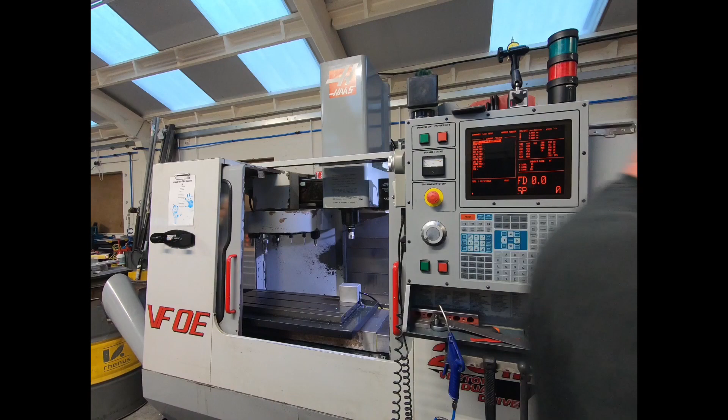Right, so I'm back here at the Haas machine. I'm going to try something with the machine to upgrade the memory. Now, anyone who's got one of these older Haas machines knows that the memory on them was appalling. This one is mediocre. It comes with 1 megabyte of memory. Now, considering my mobile phone now is 256 gig, that shows you how bad memory on these machines was back in the day. So this machine has actually got 2 memory chips fitted to the board that are 512 kilobytes each, making up the 1 meg memory.

Now, when I sorted out the blown vector drive, I took it out and also took the boards out to look at the battery on the board. I've got new batteries to replace it, but I haven't done that yet. But I noticed where the memory goes on the main PCB, there's actually 16 spaces on the board for the memory, and mine's got 2 chips in it, each 512 kilobytes. These are the little chips.

I've got the part number off the board, and I've managed to buy, if I just show you there, some genuine Samsung chips, and I bought another 14. Not sure if it'll focus on that number. I'll just drop it on the floor instead, because that'll probably help. So yeah, there's the chips.

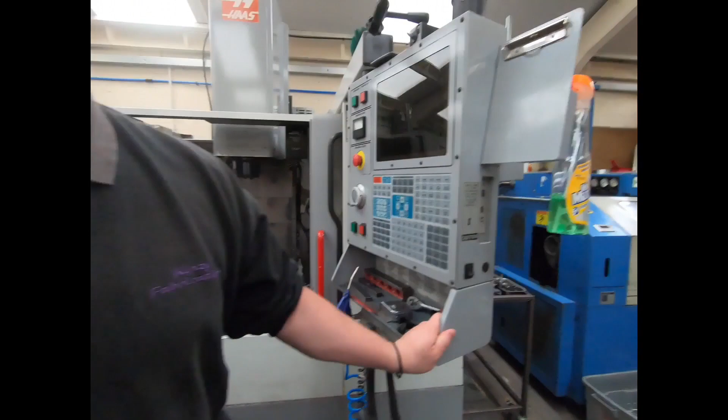If you're still going to use that to upload your programs, you're still going to be limited to the 1.44 meg that the floppy disk limits you to. Even when you're using a USB, you have to format the USB to the 1.44 floppy file size. So the downside is you're still limited, but you can upload larger programs, I've been told, and I've not tried it yet, via the RS232 cable.

So not drip feeding the program, but just uploading it to the machine if it's, say, 1 meg, 2 meg, 3 meg, something like that. So I've only used one program which is bigger than 1.4 meg, so it's not a necessity. I could break that program up into 2 parts and load them individually, but if there's more memory on the machine, there's loads of little jobs that I do, not very often, but I'd like to just leave them in the machine. And then all I've got to do is look at the sheet, check my tools, load my tools, and then I know the program's good to go because it's the same program I used last time.

So we've got the chips. Just go around the back to where the board is. I'm going to take this board out later today because the annoying thing is you've got to take this cover off, and my one, different versions probably different, but mine's got 3 boards all layered, and typically it is the backboard underneath everything that is the one you need to get to, which has your memory chips on, and it also has your battery on it. So what I'll probably do is, because it's got the battery on it from Haas, I'll buy the dual battery board, and it just plugs into a connector, so you can put 2 batteries in and remote mount them on the panel so they're easier to get to.

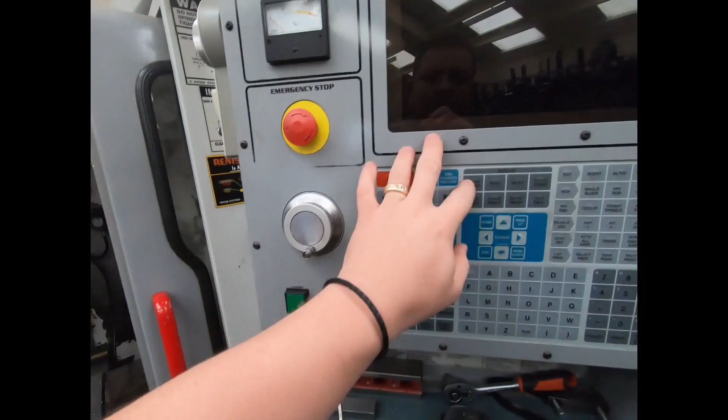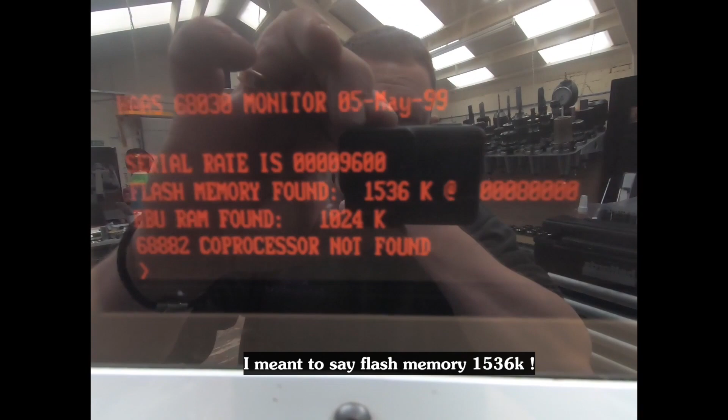So if you want to check the memory on your machine, another way to just check what you've got, let's just shut this door. When you turn on the power, you hit the power button and hold the program conversation. So let me just do that. And then it comes up here. So serial rate, there you go, flash memory found, 1536K, BBU RAM, 1024K. So that is basically the 1024 is 2 of these 512 by 8-bit chips.

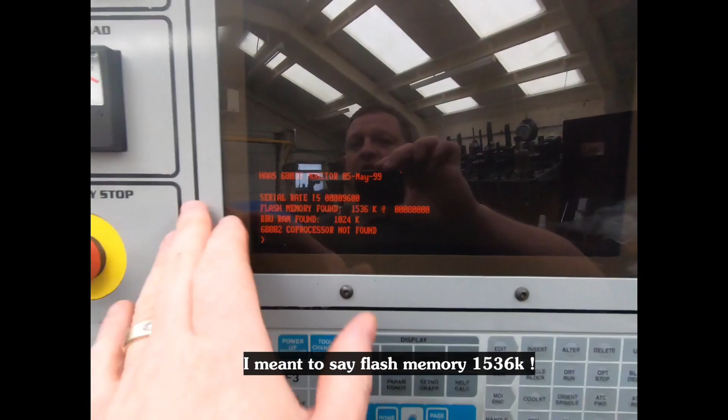So I'm hoping that when we got this soldered in and the rest of the board is filled, the first thing when I turn it on, I may or may not have to reinitialize the control, so I might not even get this first. We'll have to see. I'm not sure what the coprocessor not found means, but that's exactly as it is normally from standard. So if we have to reinitialize, through the help of people off of the Practical Machinist forum, I've got the procedure to clear the battery backup memory, I've got the procedure to reinitialize the control, and I've got the procedure to clear and reset the machine serial number if required. So if I need to do that, then that's what I will do.

But I'm not 100% sure. Some people have said they've soldered in new chips and it's worked. Different style boards. Someone said they left the battery in and done it, and they didn't have to reinitialize the control at all. They just carefully put the chips in first, made sure that they didn't short anything out, and it worked fine. But it's probably not the best idea.

So what I've done, backed up my parameters, backed up my settings, backed up my programs, got it all on a USB. I've done that last week, but I'm going to back it up again today because I've redone something on the probe macros. So I just want the latest I can. The board's going to come out tonight, so I'll do another download of settings, programs, parameters, all that sort of stuff. So I've got it if I need to load it back in the machine, get the chip soldered on in the morning, and then we'll start putting the board back in, and fingers crossed I'll come back and show you the new memory.

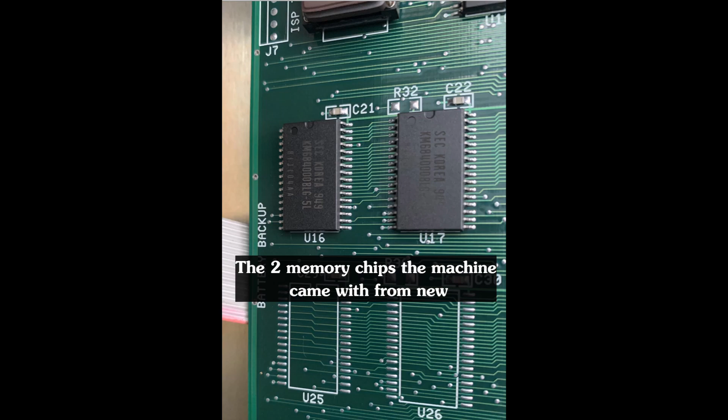Okay, so the board is back from having the new chips soldered in. So originally we had these 2 on the left here, and now we've added in 14 more. So I thought if 1 or 2 is going to work extra, 14 should work extra, or none of them are going to work at all. So let's go for it, because we're going to pay for them to be put in once and pay for them to be taken out once.

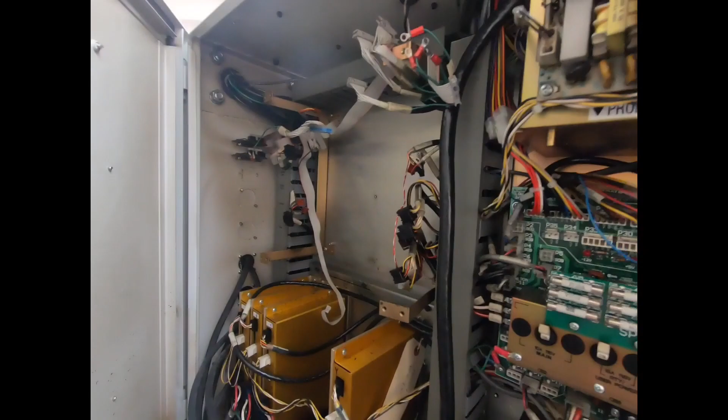So there it is. There's the other boards I took out of the machine all wrapped up. There's the space in the machine. Now they did disconnect the battery. You can see the battery's still in the holder, but he's obviously put this little tab in there just to make sure it's not making contact.

Now what I do have, excuse the noise, that's a lathe running a load of parts on the bar puller.

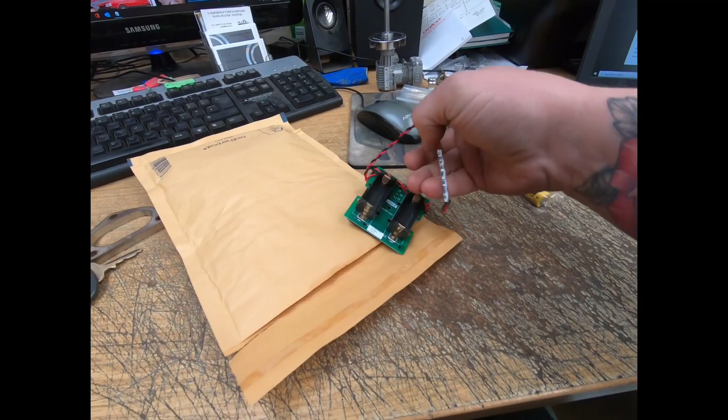While all the machine was out, we've got new batteries. Everyone says the holder doesn't come with the batteries. It did, so I bought 2 elsewhere and it came with 2. I've got the double battery board from Haas that I can now just plug in before I reinstall everything. Put 2 batteries in, mount it somewhere that it's actually easy to get to, and then the connector goes to the connector that is on the board.

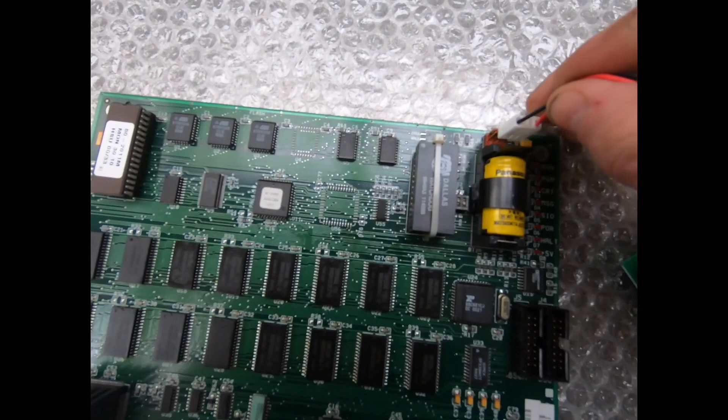Because the downside of where the battery is, it's on the actual board nearest to the inside of the cabinet, so you have to remove 2 others to get to it. So this connector will go on there, and then when you replace these batteries, the reason there's 2 is so that you can take one out, one's still connected, put a new one in, take an old one out, put a new one in, so it should never lose its memory again.

So I'm going to get this reinstalled, get it all mounted, find somewhere suitable to put this, so a nice bit of Velcro that's stuck to it, and then we'll power it up and look at loading all our parameters and settings again, and we'll see if this actually works. Fingers crossed.

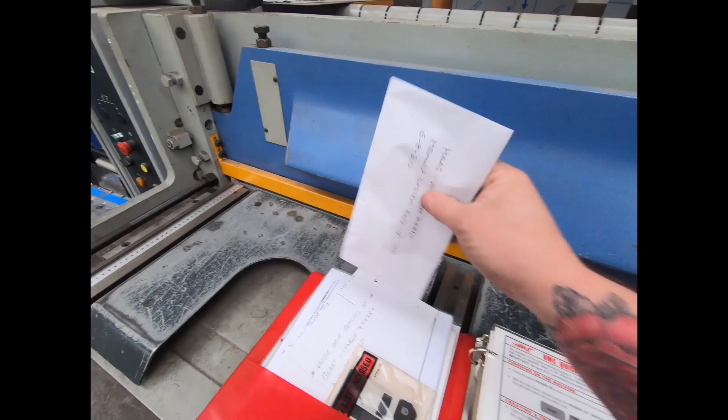Okay, so we fitted the board back in with the new memory soldered on, and we've upgraded, a bit dark in there, apologies, to the Haas dual battery, because as the single battery had to be removed anyway, we thought, why not upgrade? So that's done, the batteries are in. We haven't powered it on yet, so this first test or potential 50-50 failure is going to be seen by all of us at the same time.

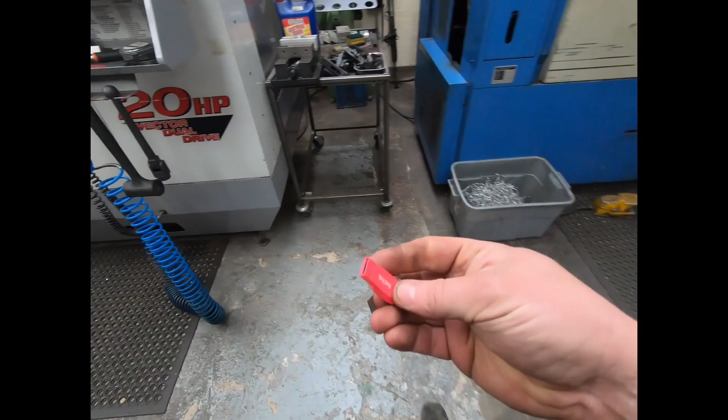Now before I took this apart, I done a parameter backup, so I actually made 3 copies in there. All the parameters for the machine, the parameters, the settings, the macro variables, the programs, and I think there's something else. There's the original floppy disk copies. That's to do with testing the motor when I've done the resistance.

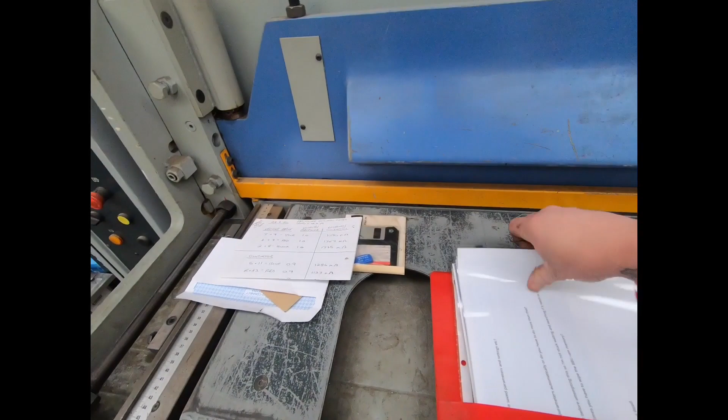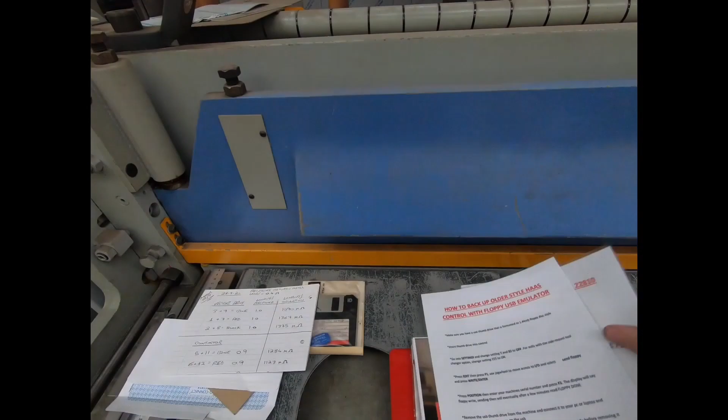This is what I printed off the internet about loading programs. This is something that one of the users on the forum jotted down for me on the conversation about upgrading the Haas memory, so I've got some info there. And then that was what I wrote down. These are the ones that we've got: offsets, parameters, programs, settings and macro variables. They're my codes. So we've got to look at how we restart the machine.

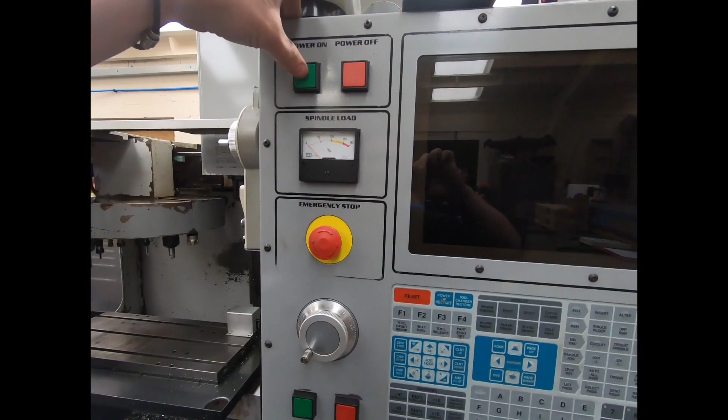Now, because this is as new to me as it is to you, let's turn it on, and it either will not work at all, or we will be playing around to try and get the machine reset, because the battery's been out, in actual real terms, and we have lost anything that we had stored.

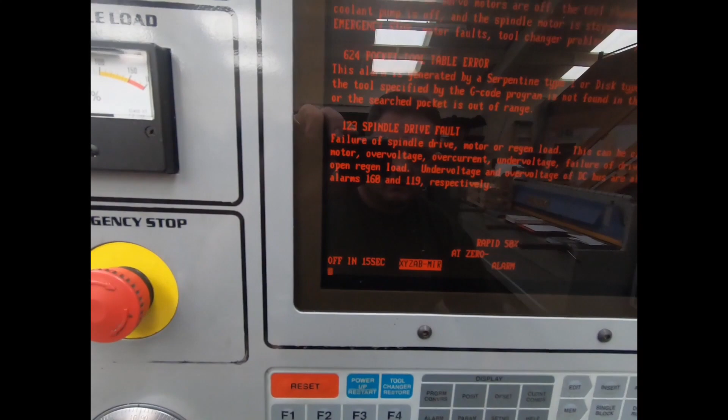So right, we just got a flashing cursor up the top. Right, we've still got some of this stuff in there, which is a good sign. Setting CRC error, system error, pocket tool table. Right, so we're on there. What have we got? Right, so we're getting a countdown, so we're going to have to go through this and start again. So I've got off in 15 seconds, XYZ AB, alarm, pocket tool table, spindle drive fault and servos off, and

we are shut down. So what I'm going to do is have a quick read, see what I've got to do to start with, just to get the machine to stay on, so I can go into some settings and try and change what I can. Then I'll come back and I'll try and do a step-by-step with the camera. Fingers crossed. Right, let's balance you on the toolbox.

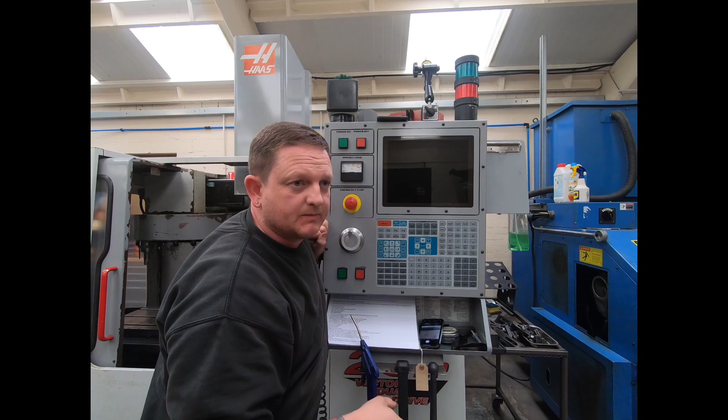Right, it's 5 minutes later on. Anyway, we had the alarm giving me 15 seconds to shut down. What I noticed, when it comes up with the Mocon version, software version, next to model, it was blank. So from what I've read on the forums, the machine doesn't know what it is. Say a VF2, a VF6, as this one is a VF0E. So got to the 15 seconds, it shut down.

From what I'd researched before I tried to do this upgrade, to have everything I need rather than have the machine offline while I searched the internet, I'd found that someone said turn the machine on whilst it's still alarming out and starts to count down for 15 seconds, hit settings, go through to setting 7, which is your parameters lock, turn it off, and then go back, quickly type debug, and then press enter, and then you'll have a little cursor flashing here. It doesn't tell you what to do, but when it's flashing, there's 4 or 5 N's, I think it is. Then I typed, where are we at?

VF0E for this machine. Your machine may be different. Whatever model it is, you've got to put it in exact. Press enter. Now that cleared the alarms that were on the page. It turned off on its own, and then it turned back on, went through the stage, and this time it showed Mocon number 11, software version 10.35, and next to model it now says VF0E. So it knows a little bit more than it did the first time round.

Then the page come up and we've got another load of alarms. What I wasn't expecting is that there's another shutdown alarm saying regen overheat. And then underneath it, it says regen overheat time shorter than parameter set in parameter 297 or something like that. I didn't quite catch a glimpse of it and it's turned off. So we're going to go back in now and then potentially type debug, I think. I'm just going to have a quick read of what he said. Where's my phone?

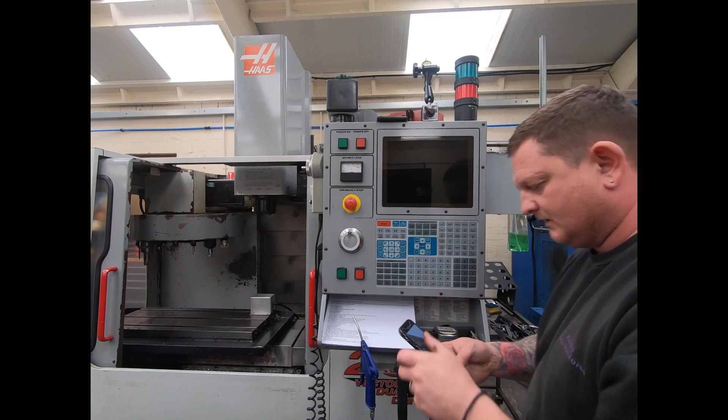Bear with me, this is going to be a boring video for a lot of you, but for anyone who's in the same situation as me, this video is going to be a godsend if it works. And if the memory side of it doesn't work, it will be a godsend video for if your batteries fail or they go flat or you take them out accidentally, knock them out, something like that, and you need to reboot from scratch. So just looking through some of the information that I found on the interweb. Right, what I'll do is I'll have a read through and then I'll be back in a minute.

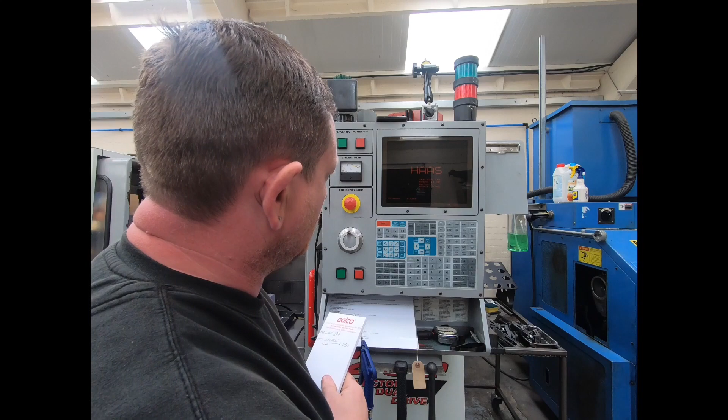Okay, so I'm turning on again and I'm going to try and get rid of one alarm at a time. So the first alarm that I've seen, which is shutting me down 15 seconds, it says regen overheat alarm. So I've got my model number now, software versions, regen overheat. Now it's going to start counting down. I can keep pressing reset to buy more time.

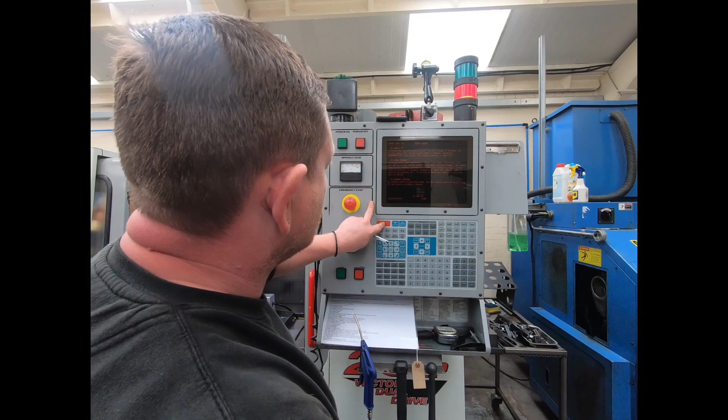So we've got the regenerative load temperature is above a safe limit. This alarm will turn off the servos, spindle drive, coolant pump and the tool changer. One common cause is the input voltage too high. If this persists, automatic shutdown will begin. Specified by 297. So I'm going to go into parameter 297. I've got that in my book. I'll just show you before that shuts down. I've got parameter 297, max overheat 250.

Let's go back here. Keep pressing reset. Resets me to 15 seconds. So I've got to, in the 15 seconds, get into parameters and find parameter 297. All the way down. Right, we are on 297 and we're already on 250. What I might have to do... So we've got a 176 and an emergency stop. So we've got an overheat shutdown and a 122, but they're both done by parameter 297. Right, so that's already there.

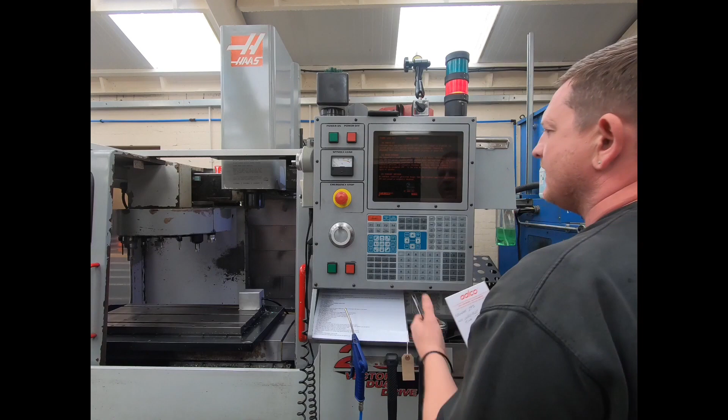So I wonder if I can put in the USB. Keep resetting. I'm going to put my parameters USB in. Right, that's in. Now while we're still alarming out, try and get into floppy directory. I'm still there. And now I need to go to parameter 22810.par. 22810.par. Enter. Right, we're still counting down. So that didn't work. Right, let me look at more alarms and we'll be back again.

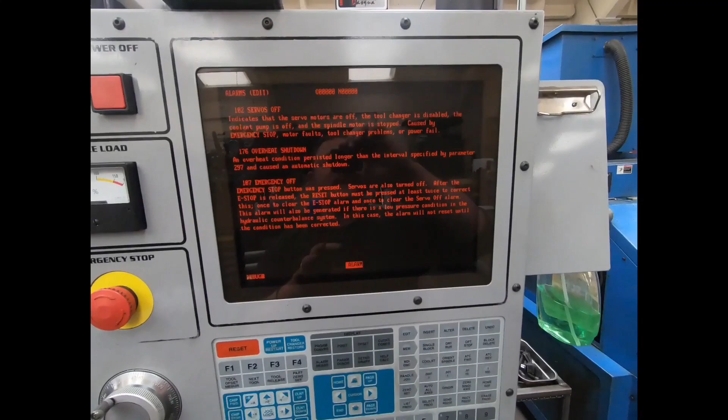Okay, we are getting somewhere slowly, little bit at a time. So we had the overheat shutdown. This 297 was still there and I had a continuous countdown, 15 seconds. I looked through a lot of parameters. Some of them are factory set, I'm guessing, as the VF0 comes as standard. It's going to be input from the factory. Some of them are machine specific. So I just flick through the pages, checking various ones in the book. Some are correct, some are blank or completely wrong. But I couldn't get rid of the 15-second shutdown.

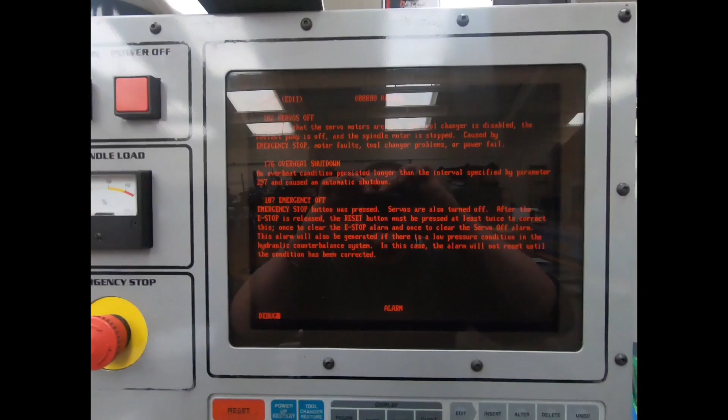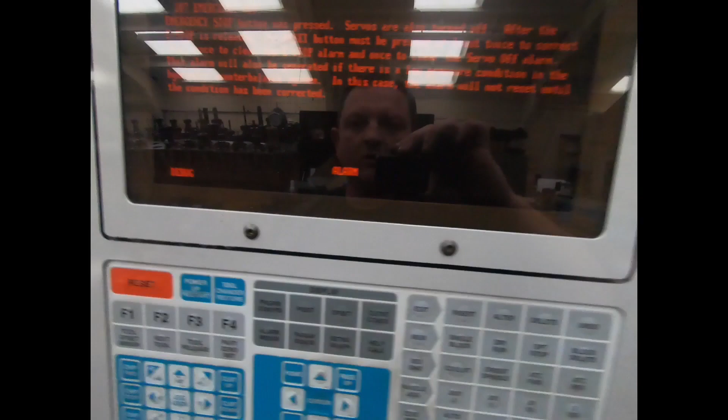Now, looking at what I copied from Practical Machinist forums, there's a user called Roma. He gave me a load of information about how to reset machine serial numbers. Now, when I looked in here, my machine serial number is 1624199. It's completely wrong because my serial number is not that at all. It's only 5 digits. So he's got reset serial number, press the emergency stop in, which is what I did.

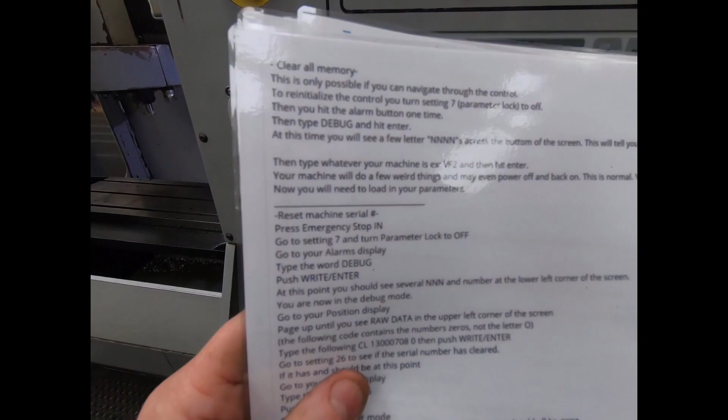And even though I turned off parameter lock before, I didn't realise that once it rebooted, the lock is back on. So I went, as it says here, sorry about this, it's probably not going to focus very well on here. Go to setting 7 and turn the lock off. Now, once I went to setting 7 and turned that off, the 15-second alarm has stopped.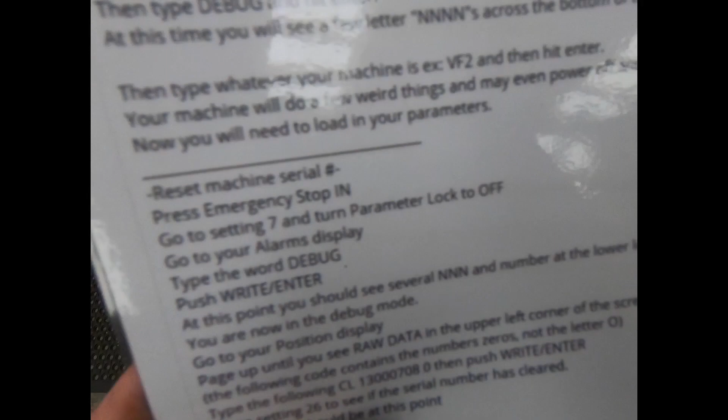So now I've got to type the word debug, which I've done there, and it says push enter, which is your button down here in the corner. And then, again, it may not focus on this, I do apologise. At this point, you should see several N numbers in the lower left corner of the screen. You're now in debug. Go to position display. So let's press enter. Auto off alarm. Right, so we've got sounds there, auto off alarm, and we've got the N's at the bottom.

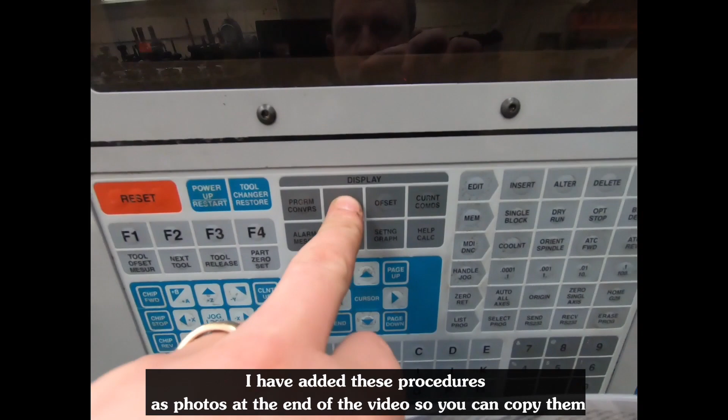So we are, like he says, at this point you should see several N's and a number at the lower left corner of the screen. That's what we've got, several N's and a number 0. You are now in debug mode. Go to your position display. Page up until you see raw data in the upper left-hand corner of the screen. Position, raw data, edit. Just going to check. Right, so that's the only page. There you go. Position, raw data, edit.

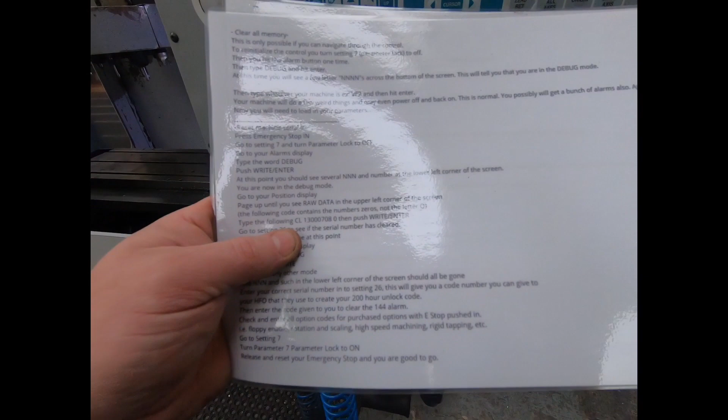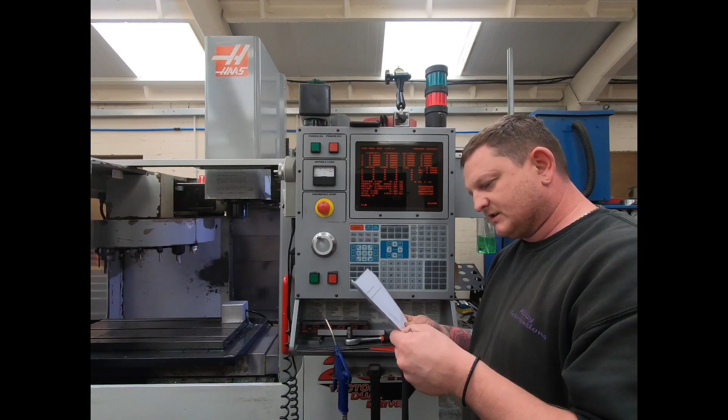The following code contains numbers, zeros, and they are not the letter O. Type the following. C, L, and you can see it there. I might just put this camera down again for a second while I type this. Apologies. So you've got CL 13000 708 0. So remember that they are zeros, not the letter O. So we've got CL130007080, then push enter.

Okay, still alarming. So let's go to settings and we'll go back to 26. See if the serial number has cleared. See, we're up there. That is not my serial number, so that has not worked. So let me go back to the position, raw data. We've still got the emergency stop alarm. I wonder if...

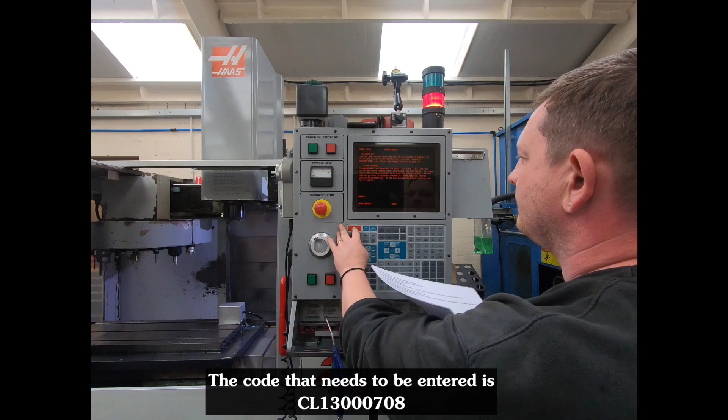Right, so I'm going to try again. We're still in debug mode. Position. Raw data. CL130007080. Zero. But that's not doing anything. So if we go into settings, the serial number is still there. Let's just see.

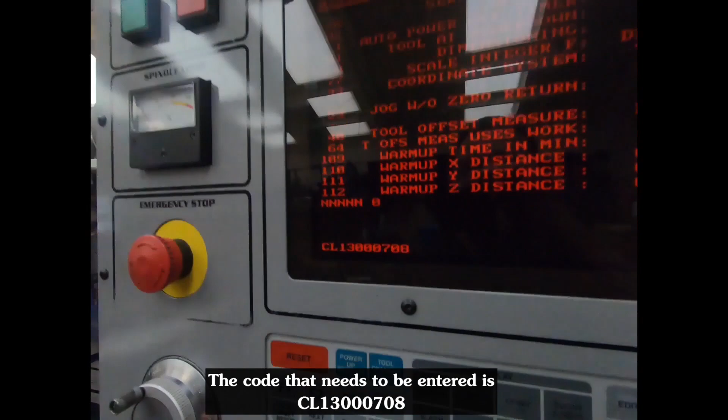Right. He must have pressed this by accident. So it's CL13000708. Then there's another 0, and I think he's put that accidentally because I've left it off and my serial number has now reset to 0. So just for anyone who finds this info on the internet, that's the number you've got to put in. There is no 0 after the number 8, and then that has reset my serial number to 0. Right, so we're getting somewhere. After all this, I still don't know if this bloody memory update is going to work. So if anything, it's a learning curve.

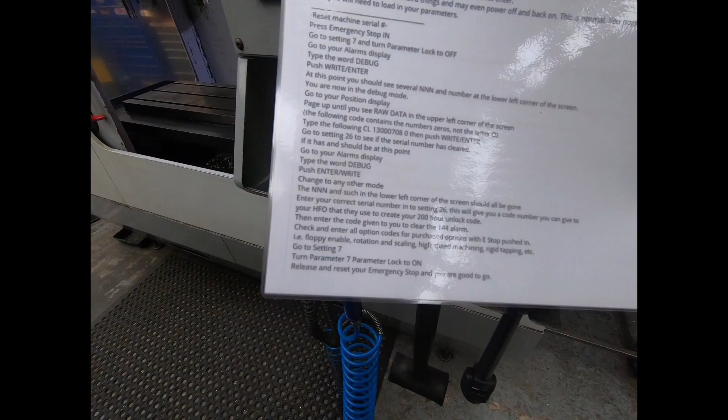Go to your alarms display, type the word debug. Sorry about that, I'm gonna put you down there again because it's difficult to read this. You're not going to see close up, but I'll talk you through it. So we've reset the serial number. By this point, the serial number should have cleared. Go to your alarms display, which is what I'm on. Type debug. Push enter.

Change to any other mode. Let's just go positions. The N's in the lower left hand corner should all be gone. So that is now gone. So apologies for the compressor. The N's that were in the bottom corner to say you're in debug mode have gone. Enter your correct serial number into setting 26. So let's go down, we're in there. My serial number, it sounds stupid, but let me just check. Right, 22810 is my serial number.

Right, before I press enter, it says this will give you a code that you give to your Haas factory outlet, there's some in the UK, but I can speak to Haas, that they use to create your 200-hour unlock code. Now, I'm not sure if this machine has a 200-hour unlock code, but I'm gonna get a pen and paper ready just in case. So I've typed in the serial number, now I'm gonna push enter. Right, now the serial number is in the machine.

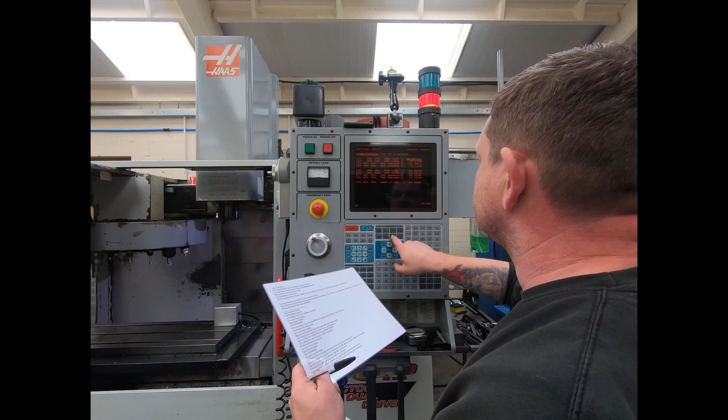Right, now I've got to try and find. Right, what I'm going to do, I've got to find where my options are, and then I've got my option codes written down like you'd have for your machine. I'll put the option codes in, and then I'll see if they store, and I'll bring you back.

Okay, so a little bit of messing around. I've never entered my serial number option codes before. You just have to go onto where it says 1 or 0 and put in your code and press enter, and it will change from a 0 to a 1 and allow you to have that. So we have managed to now get rid of all the alarms.

So what I did was, everything's on my USB. Now I've got no alarms. We're looking all good currently anyway. We've not even looked at memory and what's worked and what hasn't, so I still don't know if the machine's good or if we're in with some problems with that side of it. But if I go into my floppy directory, let me pick this up.

That'll be the phone. We'll turn that off.

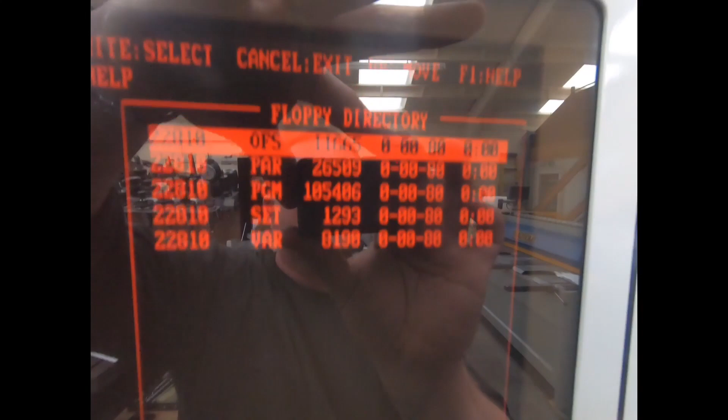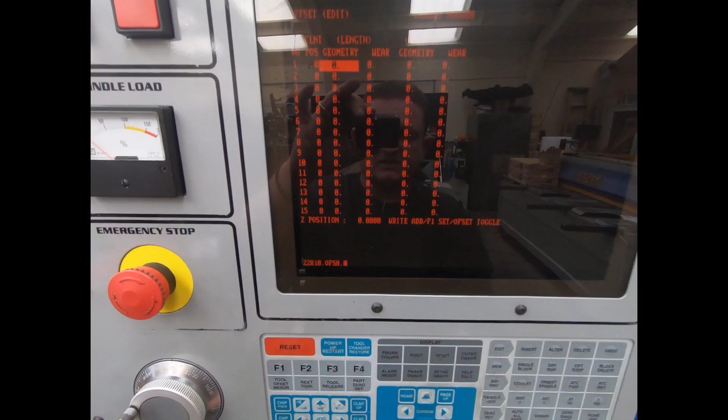We go back to floppy directory. Let me show you how mine are stored. So the first lot of digits, the 22810, is my serial number. So the variables are macros, settings, programs, parameters, and offsets. Now I can't enter the offsets. I'm not sure why, but if I go to the offset page, type in 22810.OFS, and then you'd normally press F3 for disk read. All it does is keep adding a 0 dot at the end.

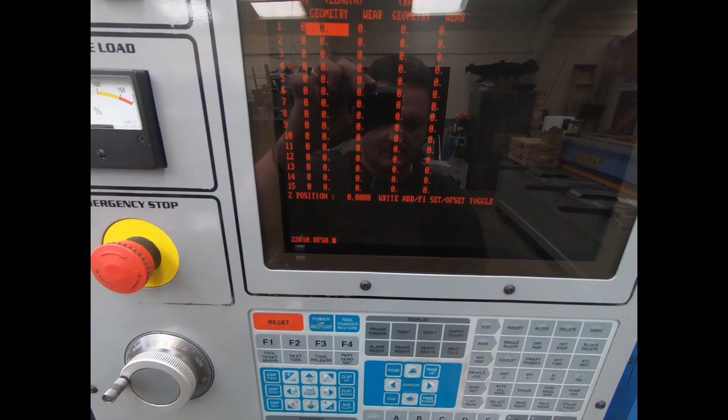So I wonder if I have to do 0FS just in case that's a 0, and then press F1 read. No, that doesn't work either. What about if I go to the offsets page? 0FS, we're on there, disk read. No, so the offsets don't read in. Doesn't really matter because obviously that's not a problem.

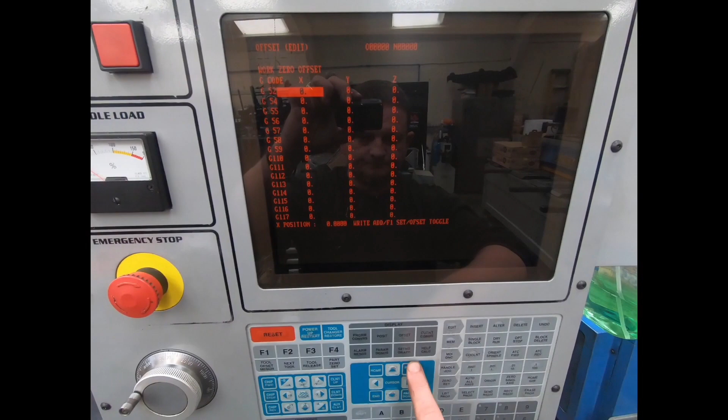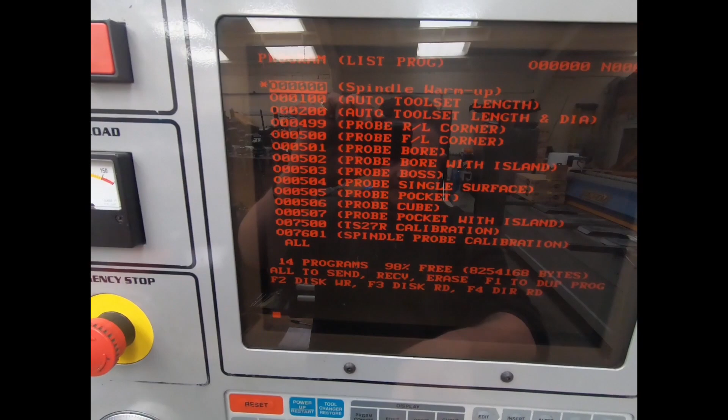If you go into current commands, I reloaded my macros, they're all there. If I now go into my programs, everything I created with my programs is there. I didn't have any actual machining programs stored in there, just macro programs for the Renishaw. So we're good in that sense. If I go to my parameters, everything's looking good.

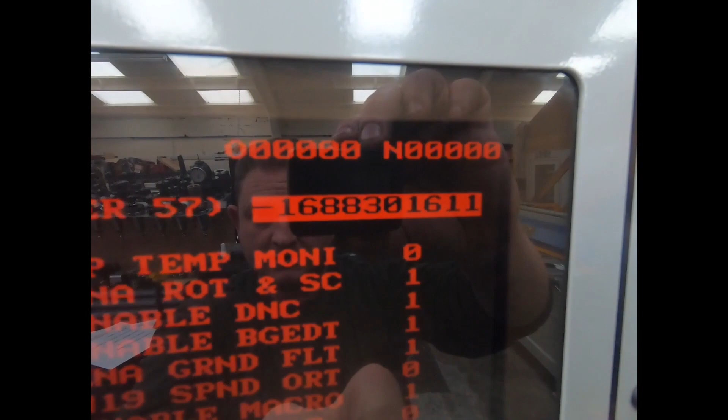I've re-enabled my rigid tapping. Repeat rigid tap was on there. Safety circuit. What else did I have? I had rotation and scaling is now turned on. And then I had enable macros. They're the only options this machine had. Everything else is looking pretty good. I haven't gone through every parameter or every setting. I can now actually turn the parameters lock back to on because I don't need that now.

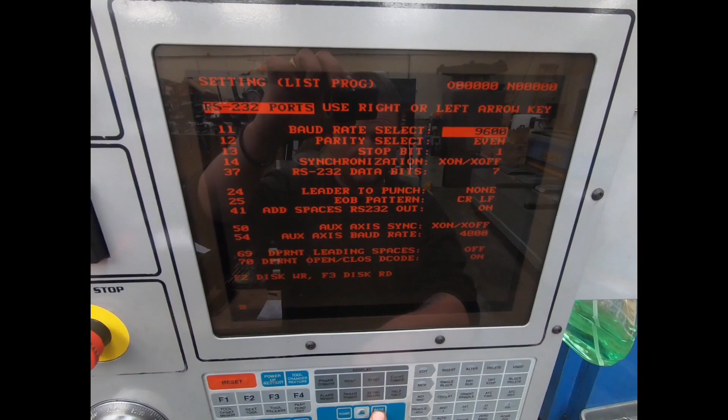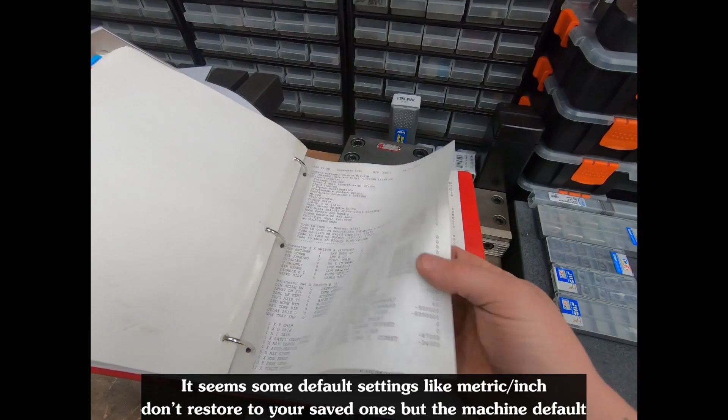All this sort of stuff looks good. It's hard to tell because there's loads of pages. Dimensioning. Inch. Not too sure, I'm guessing that would have been metric. Let me move that and have a quick look at my settings, my parameters list. Can't remember if I'm in. No, I'm in settings. Right, let's go to dimensioning. Inch, well, it does look correct. I might check a few more of these just to see if it's all looking good.

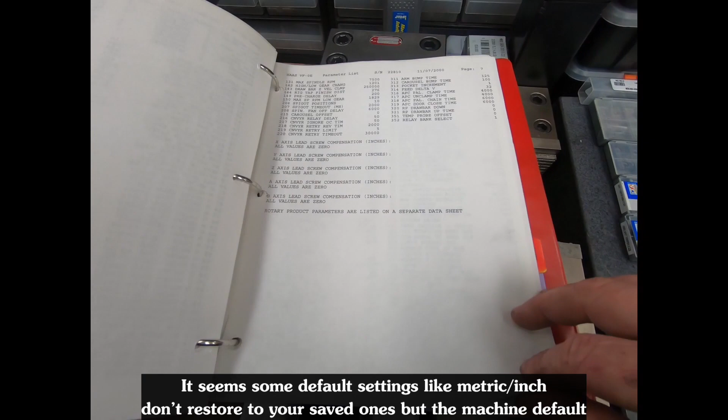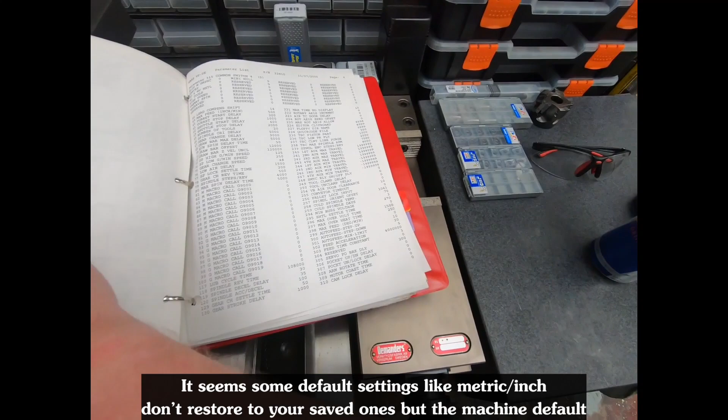The only one I did notice, which I'm going to be very wary of, was to do with spindle, tool change, offset position, something like that. Now the book, it was in parameters. Spindle orientation. Where have we gone? Sorry about that, it's not very good at focusing this camera. Spindle orientation offset 1041. Now whether this has been changed, let me try and find it in here.

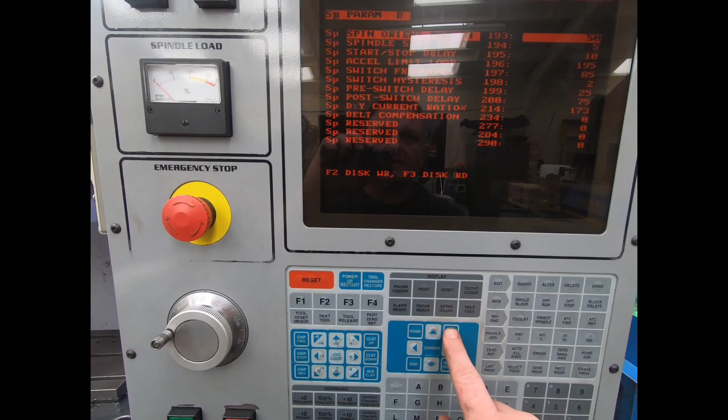So many pages now, but I can't even find it. I'm sure it was 900. It wasn't the same anyway. It was slightly different. Not a lot different, but I'm guessing it may have been tweaked. Right, I might not find it, and I don't want to have you just looking at me scour through pages for ages. Let's go a couple more. Come on.

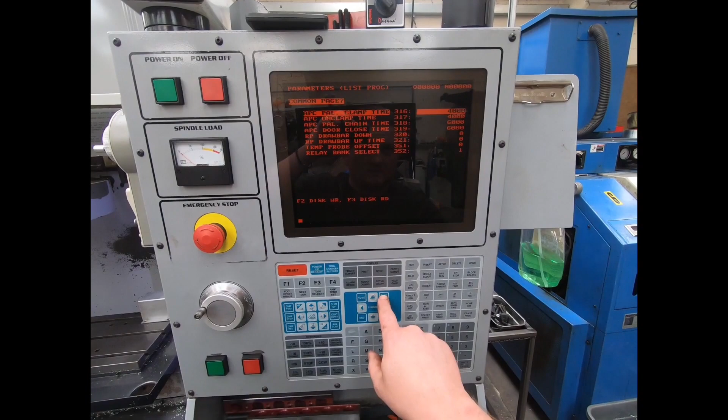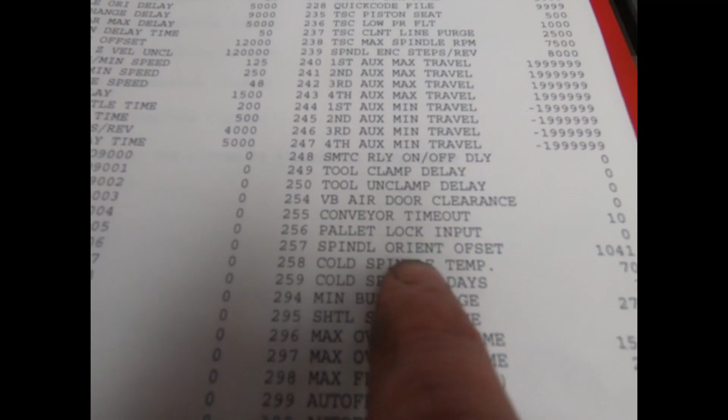I tell you what, wasting my time, let's actually see what number it is. 257, and they're saying it's 1041. Oh, there we go, look, I'm already on the page. 257, and I'm at 930. Everything else along here is the same as the book, so that may have been adjusted or tweaked at some point, so I'm going to see what happens. But anyway, that is it.

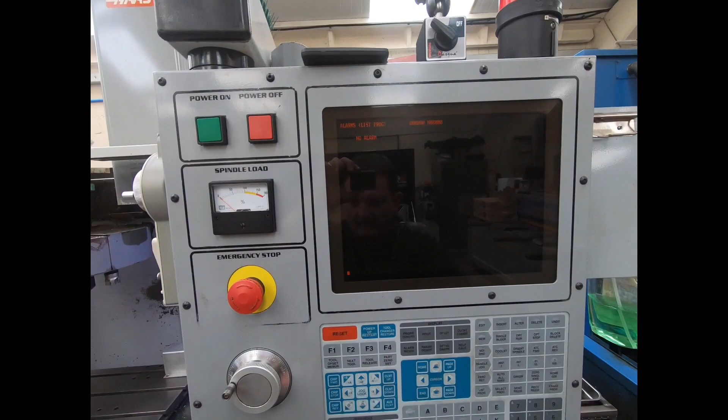If I go to the alarms page, I've got no alarms. Now if I press power up restart, I'm going to put 5% rapids on because I want to see. This is obviously not orientated, and I need to know if that's going to orientate and smash into the tool changer or whether that's going to work. So it's power up restart. Because my selection is tool 1, and I always turn it off at tool 20 because that's an open tool. Now that is locked in position.

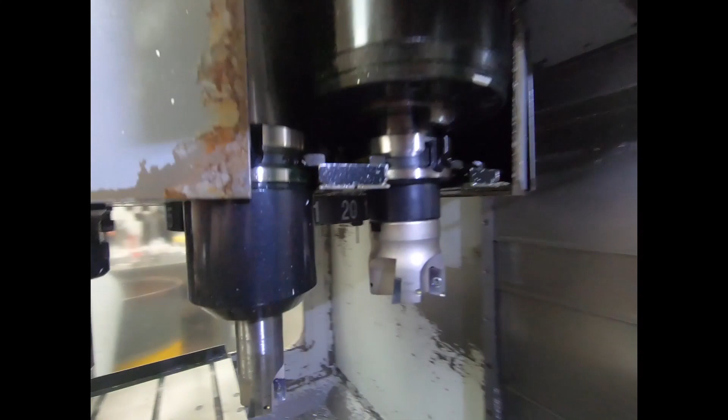Now there you go, I'm looking there. Now that looks good, to be fair. It looks good. We're going to go with it. Going to bring it down really slowly. Really slowly. And now we're almost there. And you guys can see, that looks bang on. So I'm happy to let that go. We'll start it again.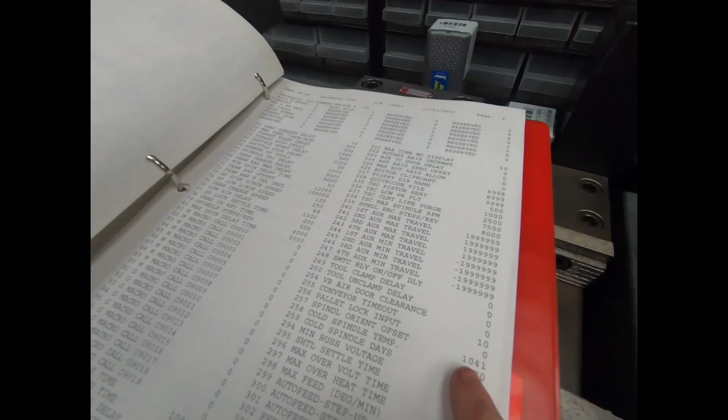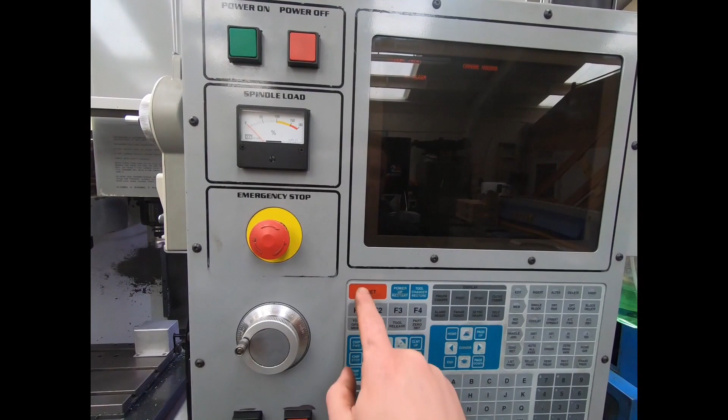Right, so that was 930. It did have ever such a slight twist as it went on. Now that may be the difference, that someone else has tweaked that themselves. And you may find, or I may find, that 1014 or 1041 might actually be better, but I'm not even going to get into messing that around now. So we are done. We are tool changed. We've got no alarms. We've got setting 26. We've got our serial number. We've got our programs. We've got everything.

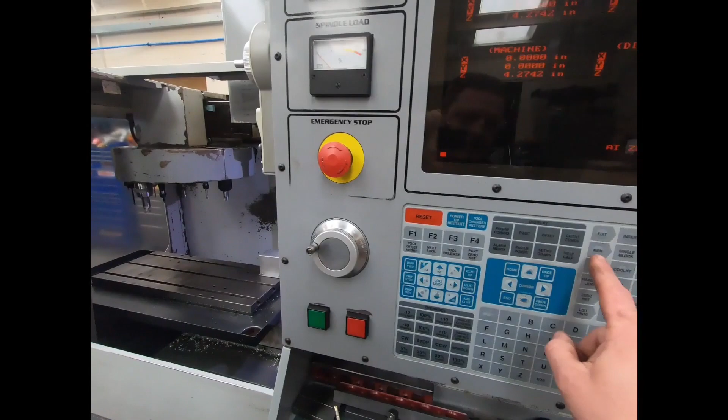So what I'm going to do is I'm now going to go back. Current command, spindle warm up. I'm now going to zero all axis. Actually, I'm going to treat it like I normally do. T20 is where I keep it. Then I'd zero all axis. This is as if I'd had it turned off, and I want to see if it starts from scratch with no alarms. And then, people, we are going to test and have a look to see what memory we've got. If you remember, I mentioned about on the initial, if you hold program conversation as you press power on, it shows you some info here.

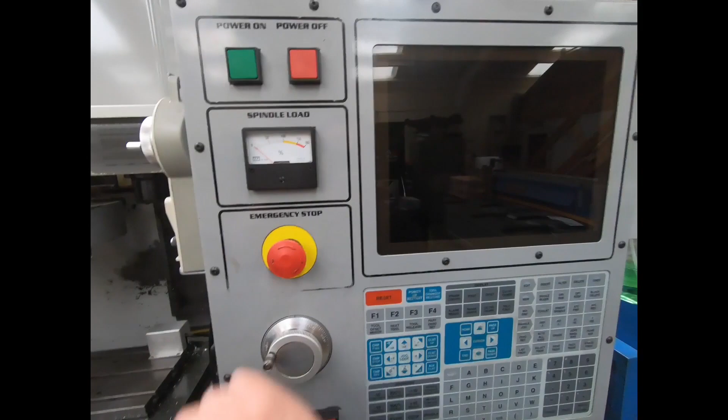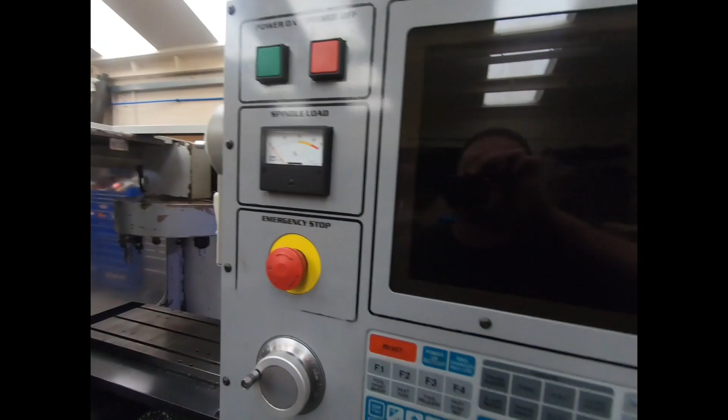So we're going to turn it off now. It's what I do at the end of the day. I'd emergency stop it, and that's how I leave my machine personally. So I come back to machine, leave the e-stop in, power it on. I also want to check it hasn't forgotten any parameters or serial number or anything like that. Flashing cursor, top left corner, VF0E, English, German, French, Italian, Spanish found. Emergency off, which is correct. Servos off, emergency off. That is exactly as it should be.

Now what I'd normally do, e-stop out, door key out, and then we should be reset, reset. We are done. Power up, restart. We're going to cycle through the tools. We'll have another watch of this figure. Lines up lovely. Everything is in there. As far as I'm concerned, we are good. Now, let's do the next one.

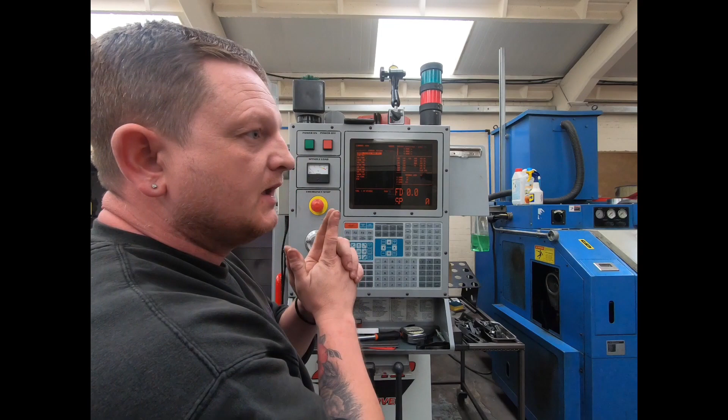Let's have a look and see what our memory says and see if we wasted. We paid £150 roughly for 14 512K chips, and I paid £70 to have somebody professional solder all 14 chips into my board. So it's going to owe me £220 if this works. So let's turn her off again. We'll emergency stop it anyway. And now to find out about your memory and your RAM, I read on the forum that if you press program conversation and power on,

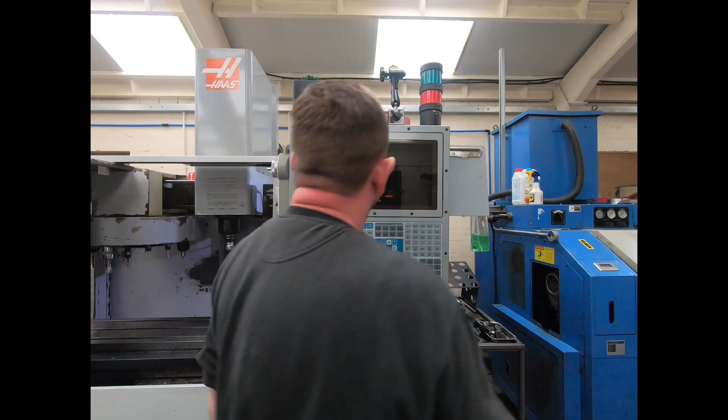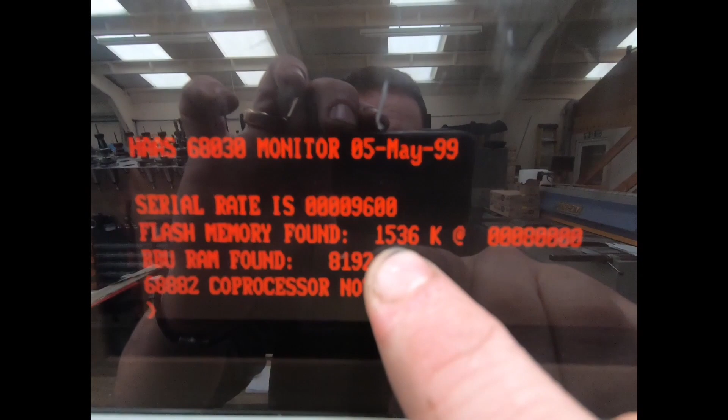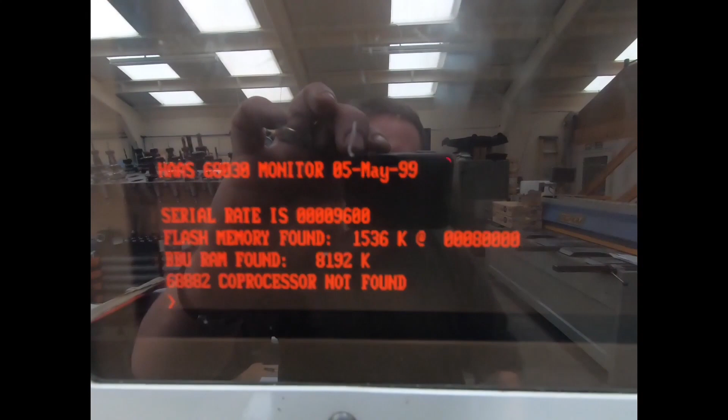now what we've got, we are looking good, people. We are looking very good. There's our serial rate, which is the same as before. Our flash memory, 1536K, and our BBU RAM, which was 1024, is now 8192. Coprocessor not found. That's exactly what it said before. And then that is 00000000, which I think means they're 8-bit flash memory. I'm not 100% sure on that. But as far as I can tell, we need to run some big programs. But that is a thumbs up and we are good.

So I appreciate everyone's help who gave me the information, loading parameters, going through tests, clearing the RAM if you need to, but I didn't need to. But to be fair, that was pretty straightforward. And now I've gone from 1 meg memory in the old 1999/year 2000 Haas VF0E, and we now have an 8 meg memory.

If you do any of this to your own machine, it is at your own risk. I done this on my machine. This is not an instructional video for you to do yours. I'm just showing you how I did mine, and I accept no liability whatsoever if you ruin your machine or your board. So that is your choice whether you do this same upgrade, whether you can do this same upgrade.